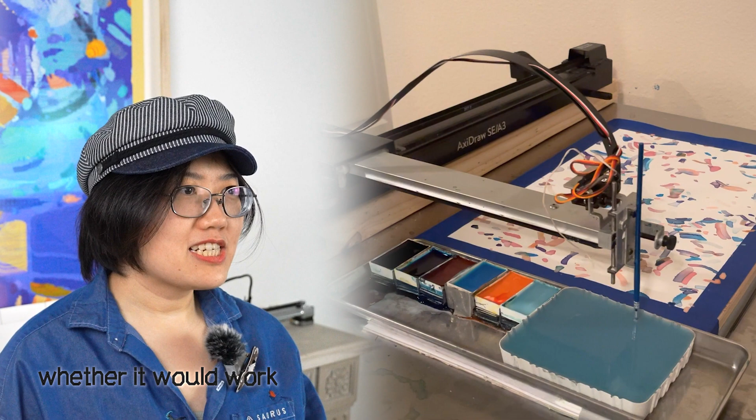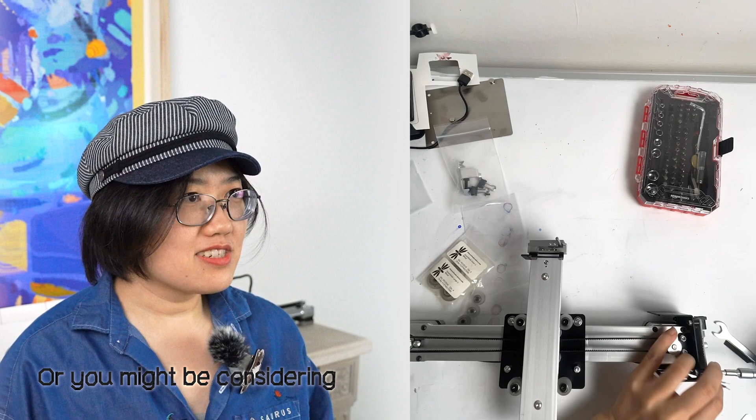Okay, let's get started. To make a plotter painting, you would need a plotter. Some of you might already have one and you're trying to decide whether it would work for the painting process or not. Or you might be looking at the available models and trying to decide which one to buy. Or you might be considering building your own plotter and trying to figure out what kind of design you would need so that it could make paintings. So let's talk about several things I think you should consider when deciding whether a plotter would work for painting or not.

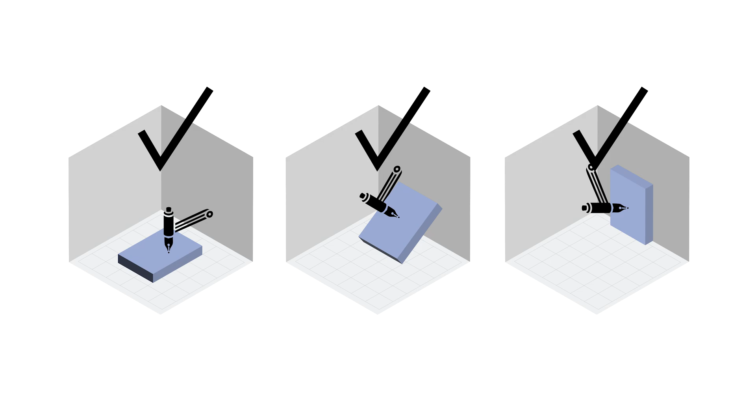First, consider the plotting angle of your plotter and think about how that would impact your paint. There are so many types of plotters. Some are designed to plot on a horizontal surface, some are designed to plot on vertical surfaces, and there are also plotters designed to plot on a slanted surface. If you're plotting with a pen or a marker, the plotting angle might not make a huge difference. However, if you're painting, this plotting angle is actually quite important.

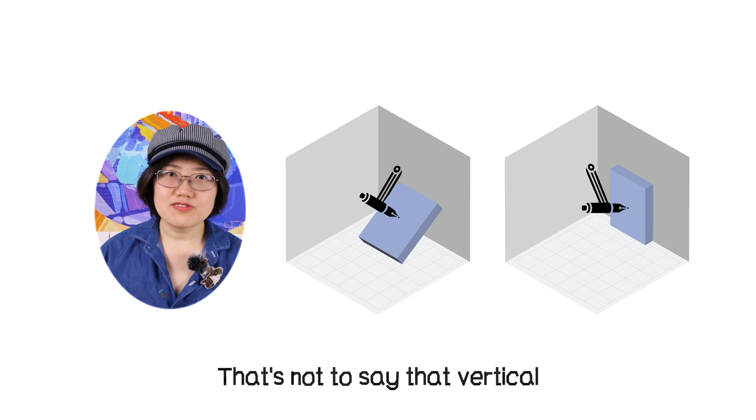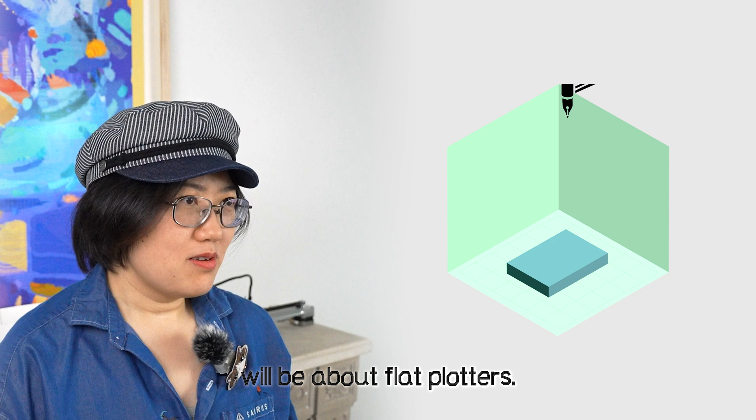If you're painting with materials that can flow, such as watercolor, ink, or acrylic, plotting at an angle means that your paint will flow down. That's not to say that a vertical or slanted plotter wouldn't be able to paint. You can definitely make paintings with vertical plotters if you're using thicker materials, for instance oil paint or thick acrylic. Because I only use flat plotters, everything I show in this course will be about flat plotters, but many of the techniques I discuss could also be applicable to vertical and slanted plotters.

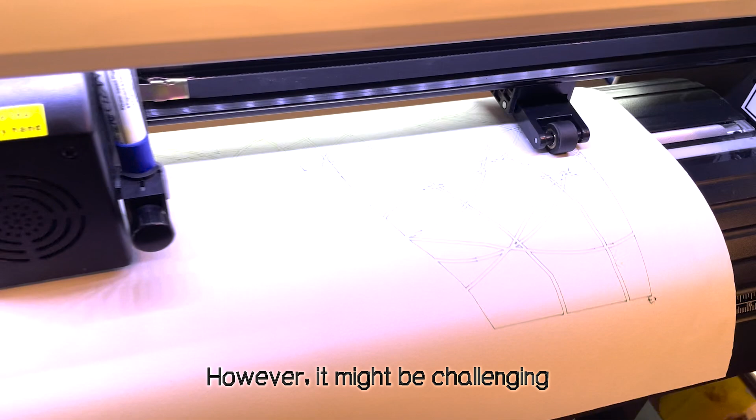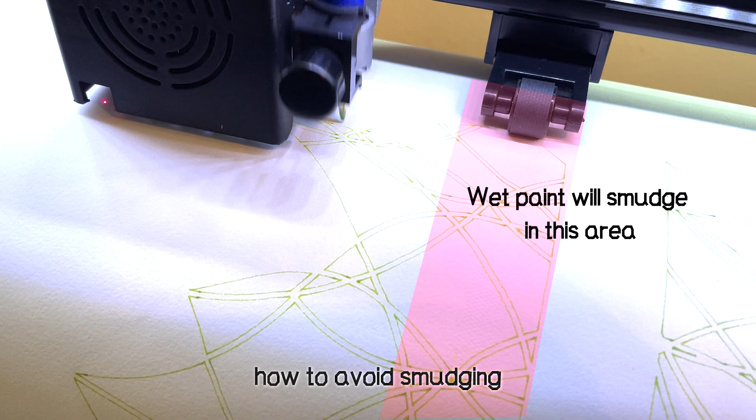Second, check if your plotter has a paper feeding mechanism. Some plotters might have one - for instance, a roller so that you can save a lot of space and plot really long images without a huge footprint. However, it might be challenging to paint with this type of plotter. These machines typically move the paper with some kind of tire, and those tires are in constant contact with the paper, so you need to figure out how to avoid smudging your paintings during the process.

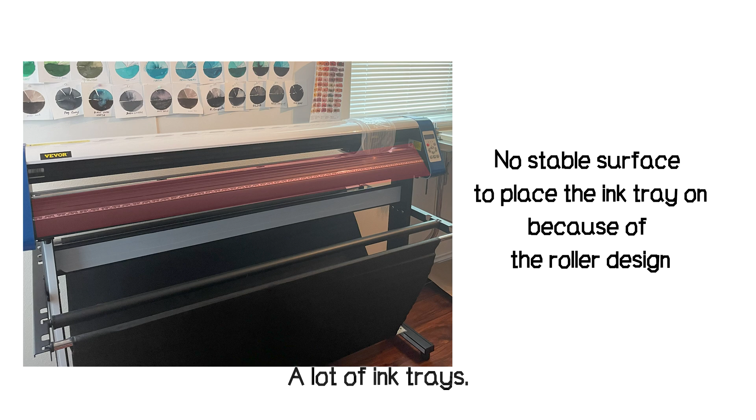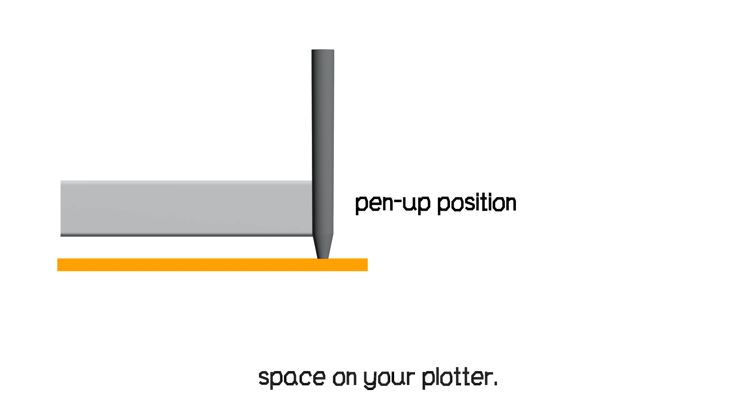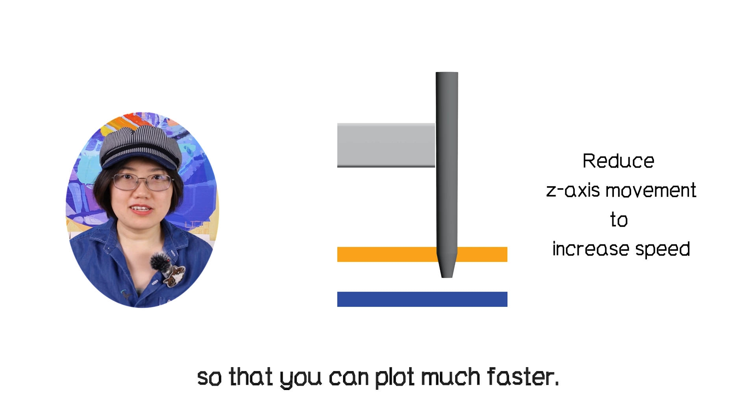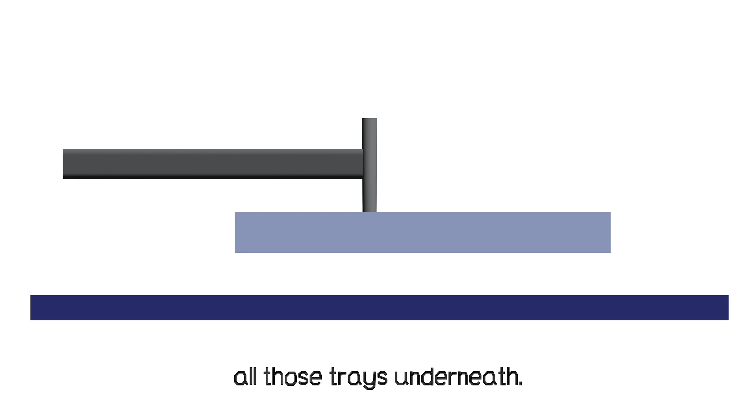And also, it might be a challenge to figure out where to put all of those little ink trays. Third, consider whether there's enough space in the Z direction. If you're plotting with a pen or a marker, it's likely that you don't need a huge Z-axis space on your plotter. If you just lift your pen slightly off the page, you would not leave a mark, and many plotters might actually optimize this so you can plot much faster. However, for plotting with paint, you need a much larger Z-axis space so that you can fit all those trays underneath. So if your plotter has extremely limited Z-axis height, that might be a problem.

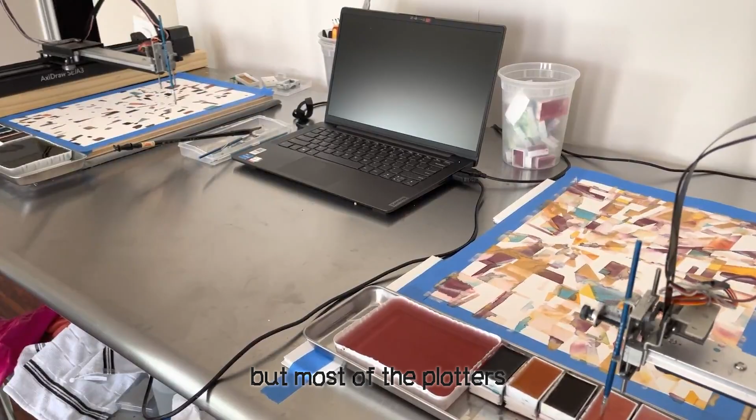So that's all the criteria I'd start with if you're making a selection. Now let's talk about the plotter that I'll be using in this course. I have many plotters, but most of the plotters that I own are AxiDraws. This is a high-precision plotter that checks all of my boxes.

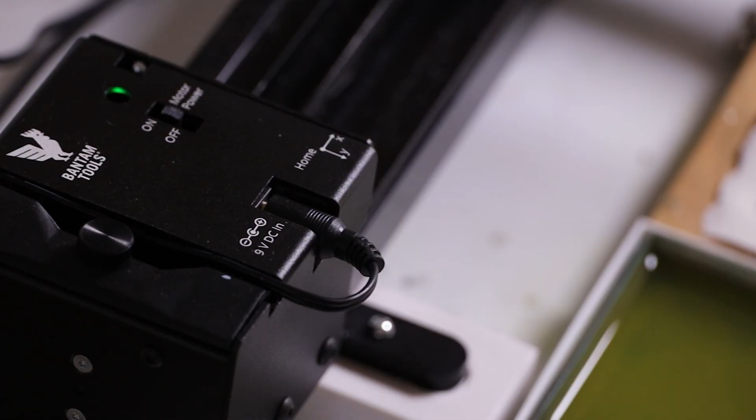It is made by Evil Mad Scientist Laboratories, which recently joined forces with Bantam Tools. They have been releasing some new models recently, including this model called NextDraw. I have so many good things to say about AxiDraw - they are reliable, they are really easy to use, and they come with amazing customer support. I just love this machine, so I keep buying more of it.

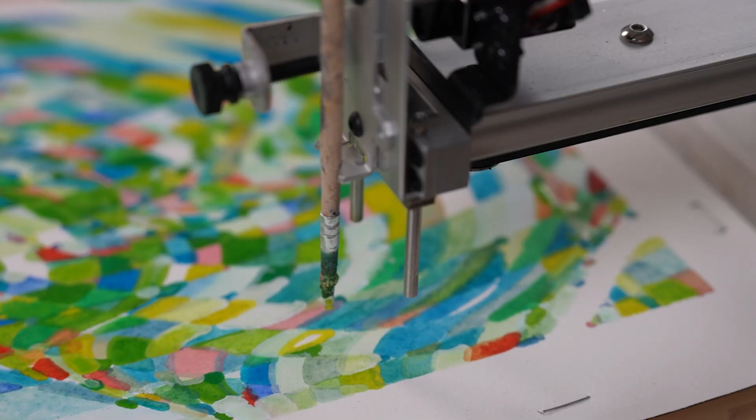In my 5 years of plotting so far, I only had one serious issue with AxiDraw, which I'm really happy to say has been fixed by a recent hardware upgrade. My issue with the original AxiDraw is with its servo motor.

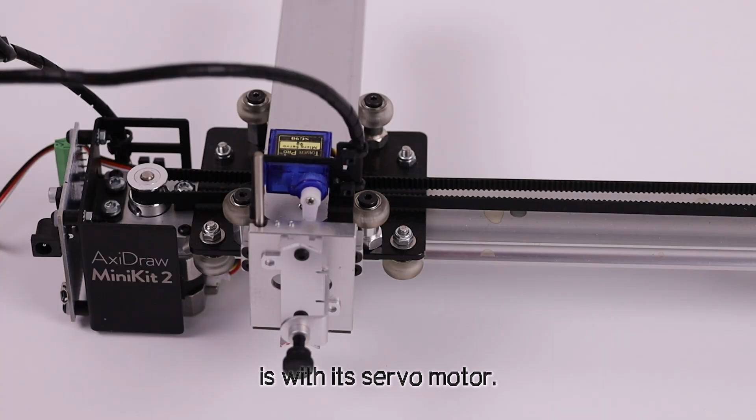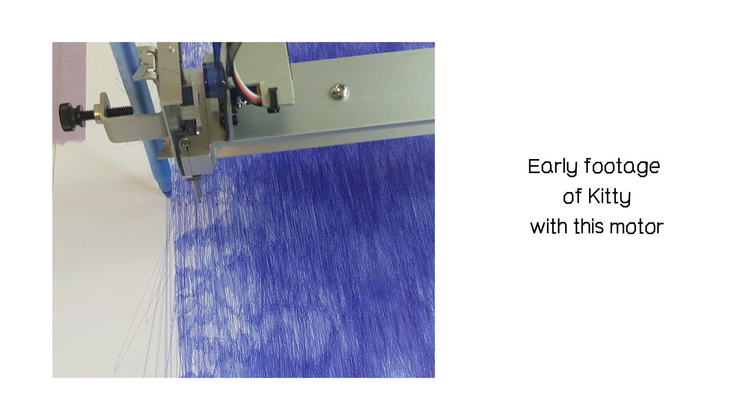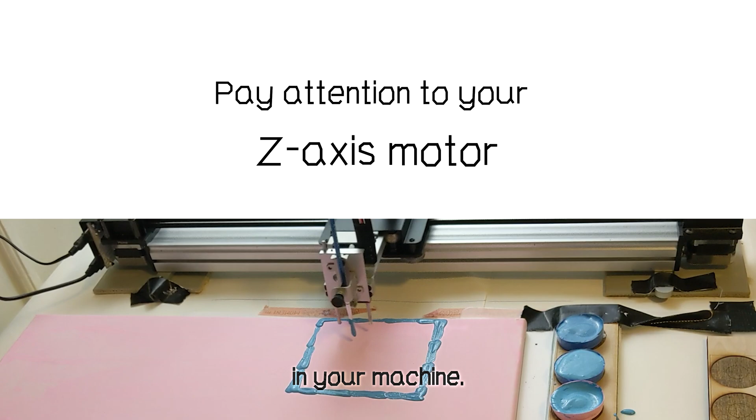AxiDraw came with the servo motor called SG90. It is a mini servo motor that is affordable, lightweight, and used in many robotics and DIY projects. If you're using a plotter that is not an AxiDraw, there's still a good chance that you have this motor in your machine.

This mini servo motor is not the most durable and long-lasting servo motor ever. After a certain number of ups and downs, it will eventually stop working. But because this motor is relatively cheap and easy to swap out, it's normally not a huge issue. I have met several artists who have been using their original servo motor with the AxiDraw for several years without having any issues.

However, painting with plotters using my method seems to damage those motors at a crazy speed. I had to replace my motor so many times. I think there are a combination of factors that caused this.

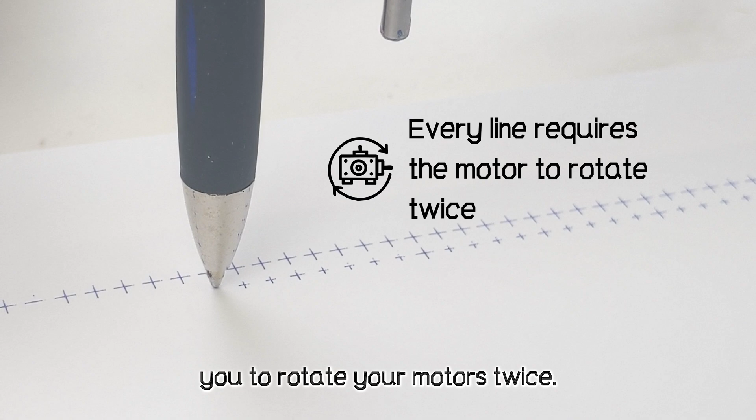To start, painting with plotters means that you are adding a lot more work for your plotters. If you're just drawing a line with your pen or a marker, you would do pen down, draw the line, and then pen up. So it requires you to rotate your motors twice. If you're painting, it means you are adding a lot more steps into the sequence.

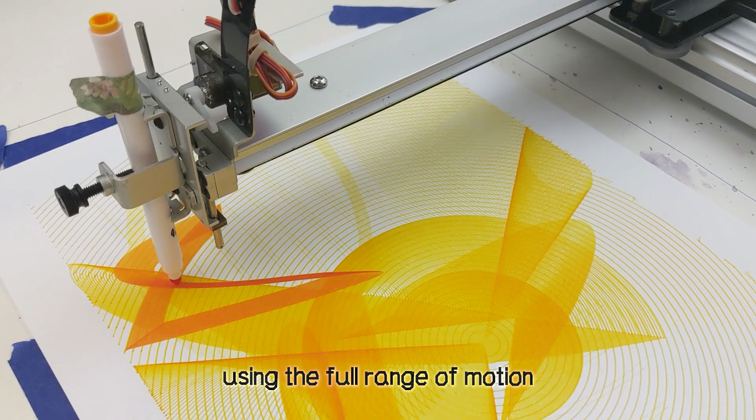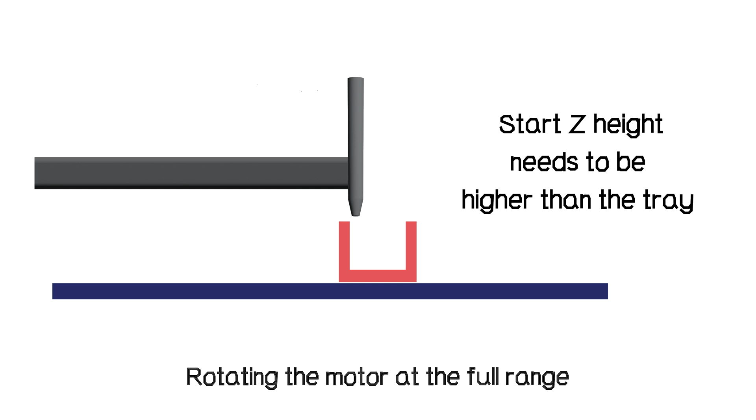The second potential cause might be associated with the range of motion required for painting. If you just draw with a pen, you only need to lift the pen slightly off the paper, so it is likely that you're not using the full range of motion provided by your motor. However, my painting method often requires the full Z-axis motion so that I can reach the bottom of the ink tray. Rotating the motor at the full range every time might also wear out the motor faster.

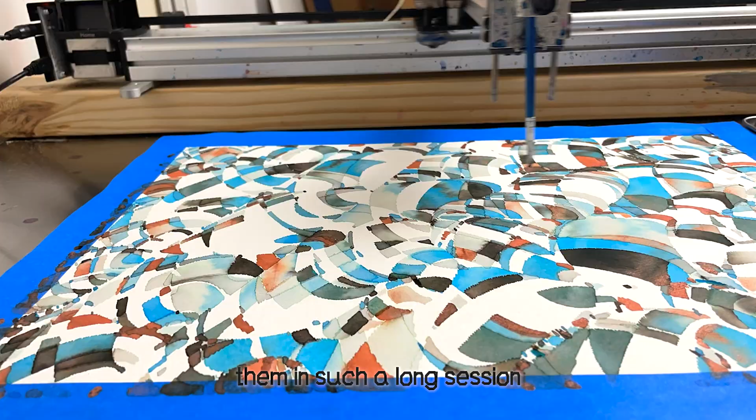Another potential cause I suspect is how long I actually run my plotters continuously. A typical A3 painting of mine would take any time between 12 hours to 24 hours. The motors are constantly running, and running them in such a long session seems to destroy them quickly.

So those potential causes are my best guesses, but because I am not an expert in motor design, I cannot confirm whether those are the actual causes. And even if I confirm that those are the actual causes, I don't know what I can do about them. I don't know how to magically reduce my plotter time from 12 hours to, let's say, 30 minutes so that I can save the life of my motor.

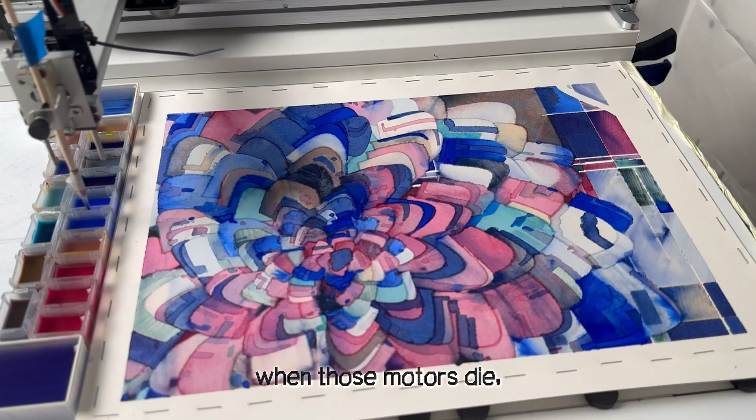So I just decided to suffer the consequences of those motor failures. When those motors die, it will typically make a scene. Your pen or brush will drag along your painting surface, kind of destroy your painting, leave unwanted marks, rip your paper.

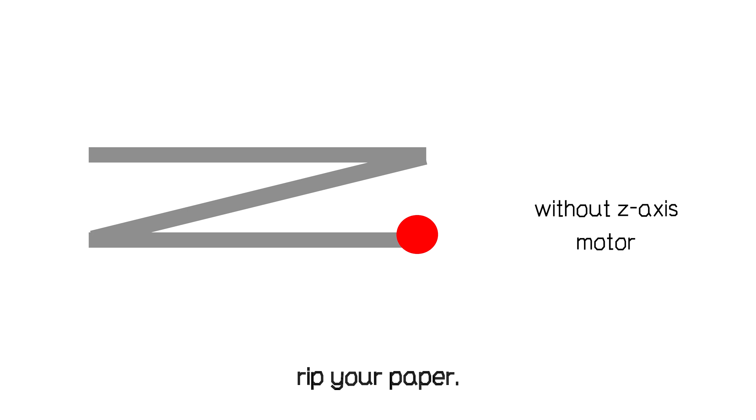Because you're painting, you have all those ink trays on your surface. You are likely to knock into some of the trays, have a water spill, have paint splashing everywhere. It's like a crime scene.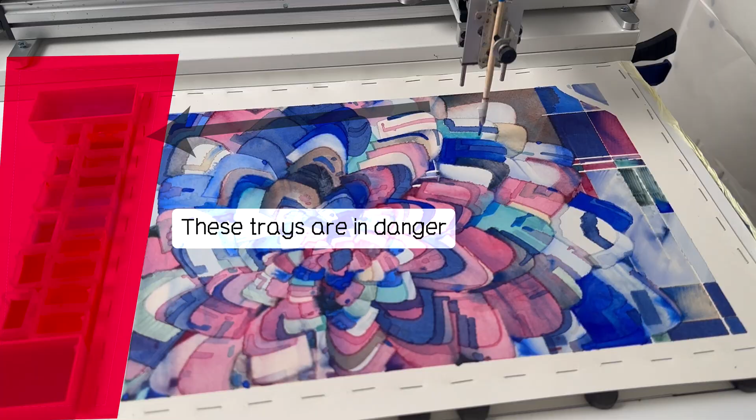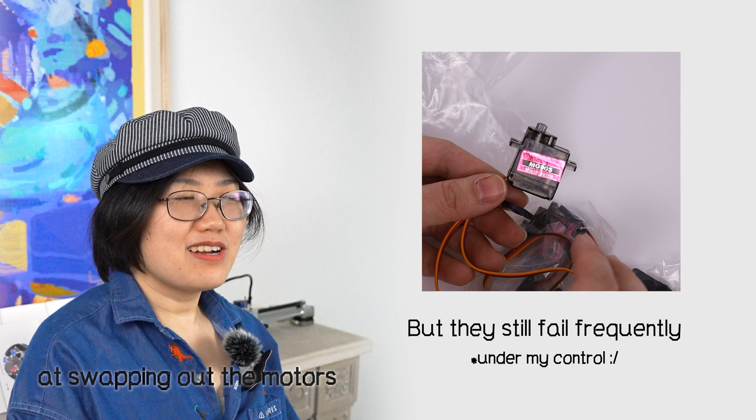Because I had broken so many motors and cleaned up so many times, now I am really efficient at swapping out the motors and then protecting everything around the plotter. And you can imagine how happy I was when Evil Mad Scientist Lab came up with a better solution.

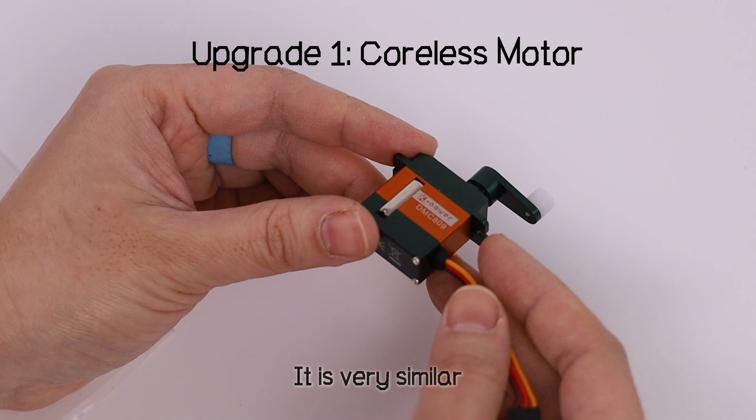They released 2 upgrades. The first one is a coreless servo motor. It is very similar to the original version, but much more sturdy, and replacing this motor is quite easy.

The second upgrade is the brushless motor. It is more expensive and requires slightly more setup because the motor needs a different voltage, but this is definitely something you can do in under an hour.

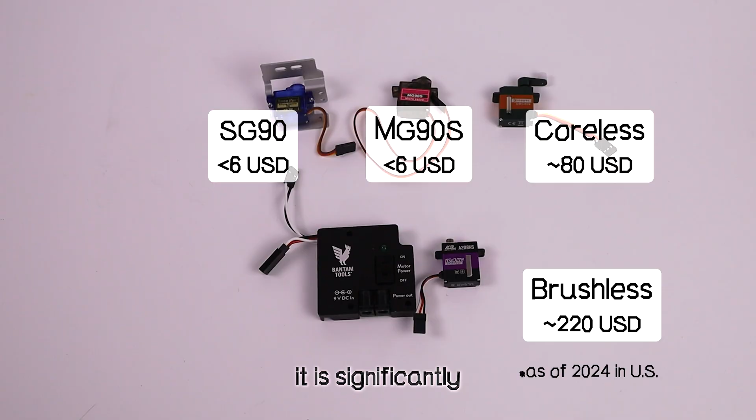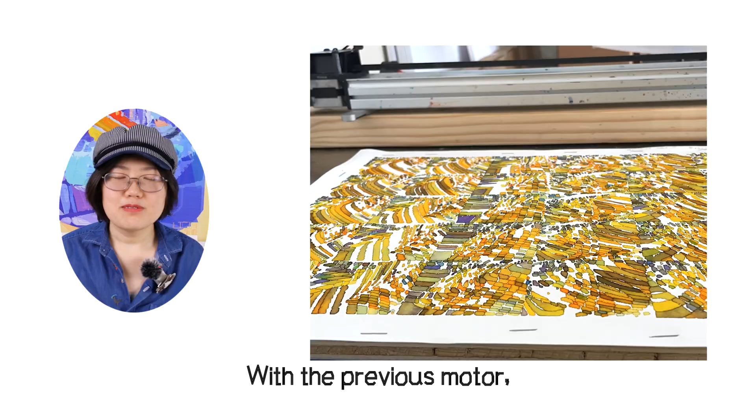It is significantly more expensive than the $6 MG90S motor, but in my opinion, it is worth every penny. It is much stronger and much more durable than the original version. With the previous motor, I'd say the longest usage time was probably around 200, definitely under 300 hours. But with the new one, I have been using it for thousands of hours and it hasn't shown any issues so far.

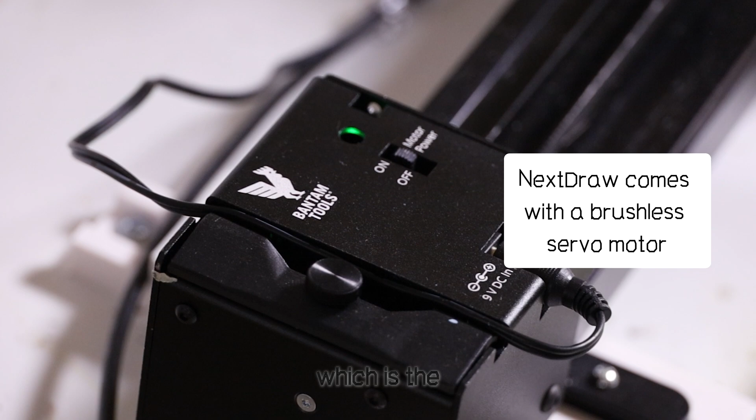So my conclusion is, I'd highly recommend that you get this upgrade if you're getting an AxiDraw. If you're getting NextDraw, which is the upgraded version of AxiDraw, you don't have to worry about this.

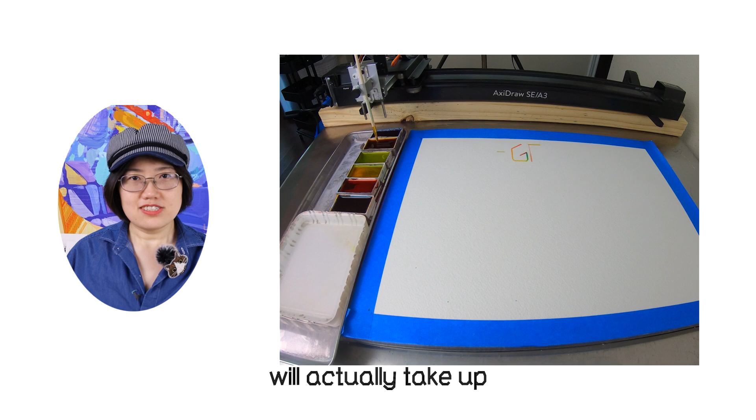Just one more thing before we move on to the next part. If you're considering buying a plotter, I'd recommend getting a big one. You see, the painting trays will actually take up a significant space.

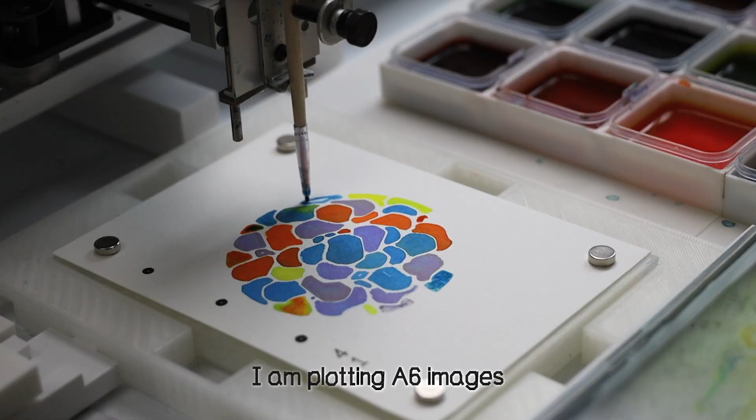So if you have an A3 plotter, you can never paint an A3 image. It will be a little smaller. You can always plot smaller images with bigger machines. For instance, like what I'm doing here, I am plotting A6 images with an A3 plotter.

So if your space and budget allow, I'd recommend getting a bigger plotter so that you have more area to work with.

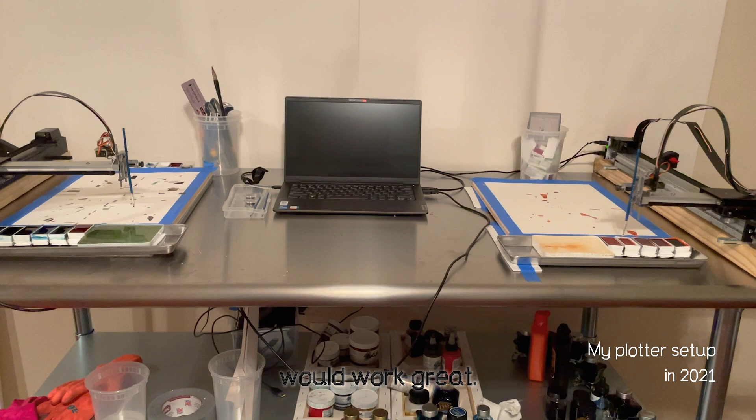Now you have a plotter, it's likely that you also need a computer to control it. Some plotters come with a built-in computer you can directly input data into and plot. But AxiDraw doesn't, so you'd need a laptop or desktop. Your laptop would work great, but if you have really long plotting sessions like I do with my paintings, your computer would have to stay on the entire time.

Therefore, I use Raspberry Pis to control my plotters. They are powerful enough to operate the plotter, significantly cheaper than laptops, and they won't consume as much energy as a typical laptop.

Previously, I connected a portable monitor to the Raspberry Pi and used a USB stick to transfer my design.

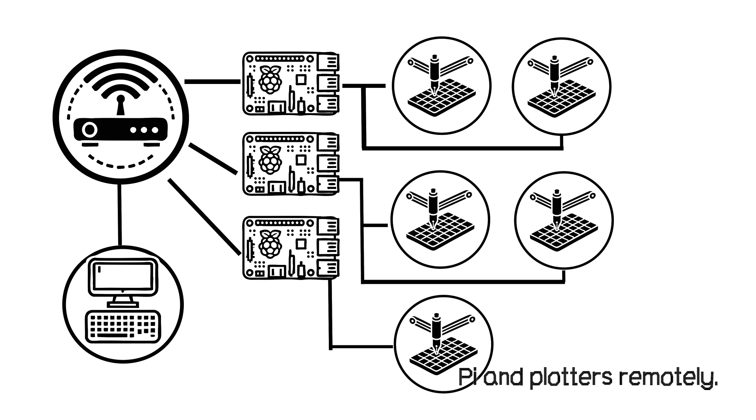But I have recently switched to a much cleaner way of operating those plotters by setting up a network and controlling all of the Raspberry Pis and plotters remotely. This might be overkill if you're only operating one machine, but if this is something you'd like to learn more about, please let me know. I might make a video about this in the future.

Now you have a plotter and a computer to control it. Let's look at how to prepare your machine and your painting environment. I'll share four principles that I use in my studio to keep everything safe and working properly.

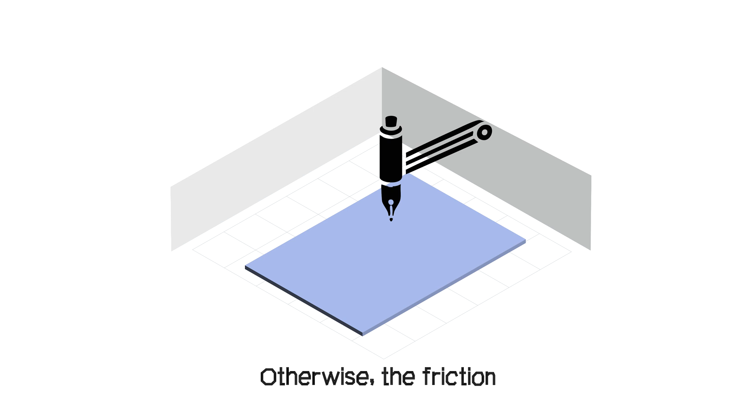First, nothing can move except for the plotter arm. When you operate the plotter, the first thing you'll notice is that you need to fix the paper in place. Otherwise, the friction between the pen and the paper will move the paper. This is true for the ink trays too, so you'll need a mechanism to keep the paper and ink trays in place.

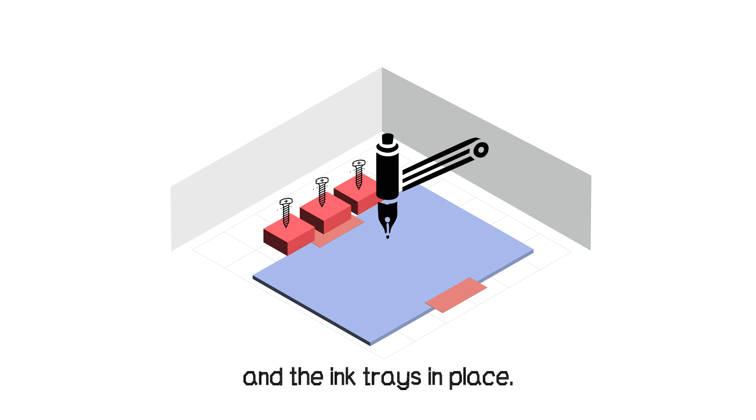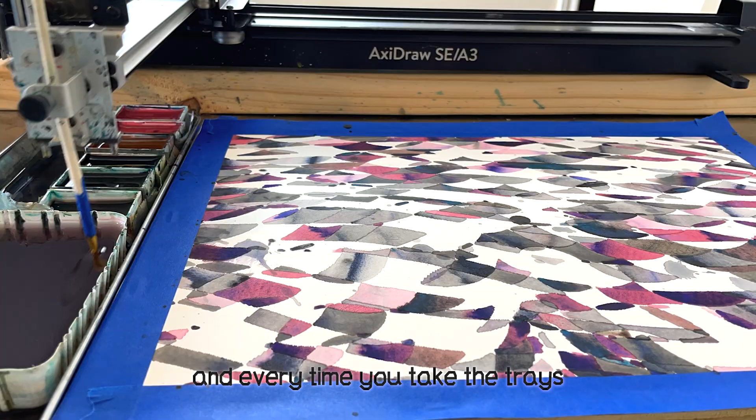I have tried many ways to fix my paper and ink trays, starting with tape, which is the most accessible and easy to use method. The issue is that they look a little too taped together, and every time you take the trays to wash, you have to make sure to tape everything back to the exact location. It gets tedious. Taping everything together is great when you're getting started and trying different setups—it's a quick way to get everything running.

However, once you figure out your ideal setup, I'd recommend moving away from tape to something more stable and permanent. Since last year, all of my plotters have switched to a magnetic-based plotting environment. The idea is simple: I have a magnetic board under the plotter, and I add magnets to whatever I need to fix.

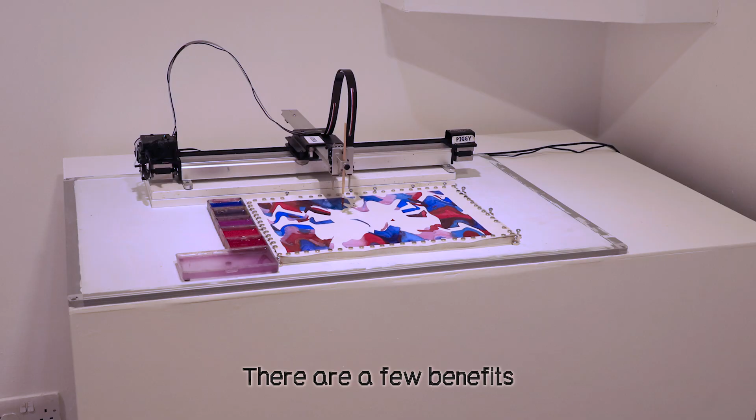If you have a metal tabletop, that's great, you're ready to go. But if you don't, you can also use a magnetic whiteboard. There are a few benefits besides being able to stick magnets on them—they're relatively economical, available in various sizes, and very easy to clean. If they get too dirty, you can paint over them, sand them, do whatever you want, and they're still functional.

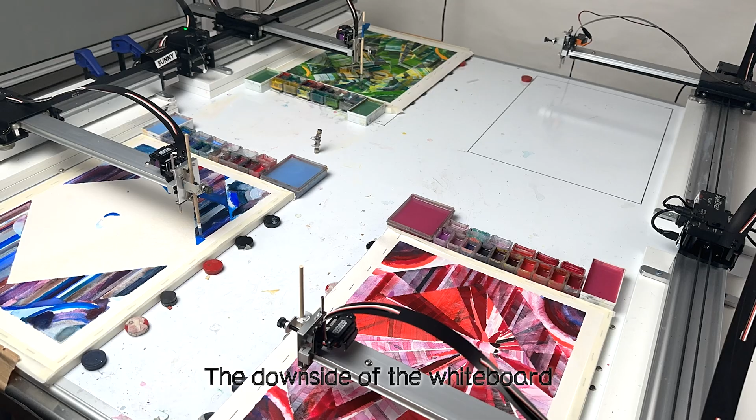The downside of the whiteboard is that they're not always flat, especially the large ones. My board is 1.2 meters and it's slightly warped. This warping doesn't matter much to me, but keep in mind it might bring some distortion to your image. Besides having a system to fix your paper and ink trays, it's also very important to fix your plotter in place.

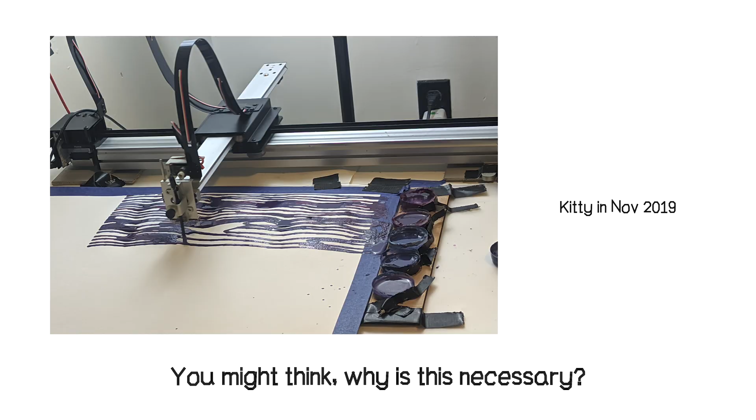You might think, why is this necessary? Your plotter is heavy enough, it doesn't move easily, so why do you still have to fix it in place? Well, that's what I thought initially. I didn't fix my plotter, it just sat on my table while doing the paintings.

It worked fine until one day I heard a super loud noise, and guess what—my plotter was on the floor, it just fell off. Turns out the motor had failed, and when it failed, the brush was at a low position, so it knocked into one of the paint trays. And because there was nothing holding the plotter, this force eventually pushed the plotter off the table.

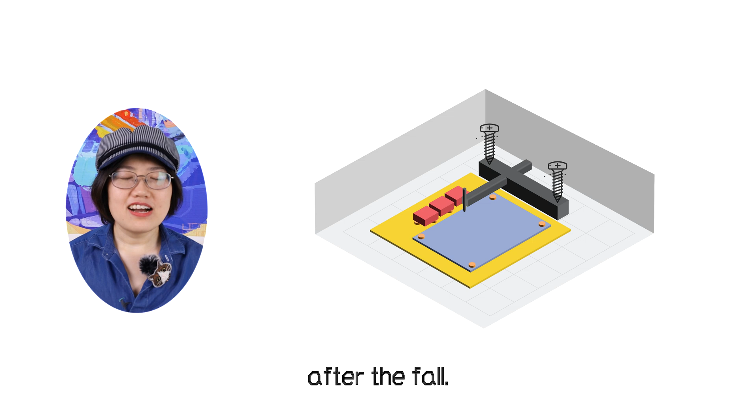Luckily, nothing serious happened. My plotter, Kitty, was still functioning after the fall, but afterwards I always fix my plotter onto the surface so it would never fall off again.

How I fix my plotter onto the table also has some connections to the second point that I'm going to make. So let's jump to the second point so that I can show you why I do it this way.

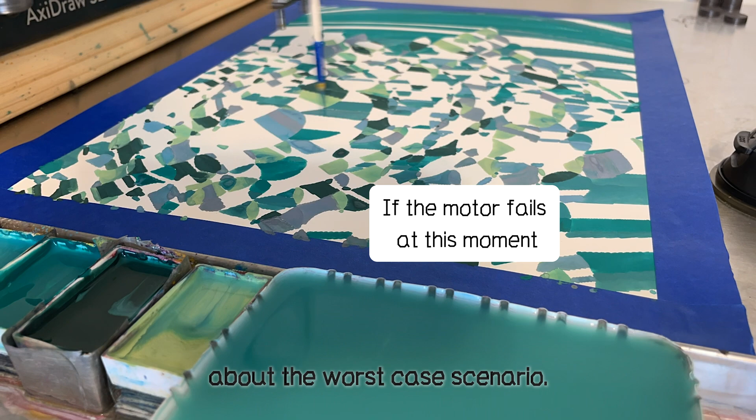Second point: water shouldn't reach electronics. When working with paint and water, it is important to think about the worst case scenario. If all of this water and paint are knocked over and started flowing without any control, where would they go? My top priority is that they should not go into any electronics.

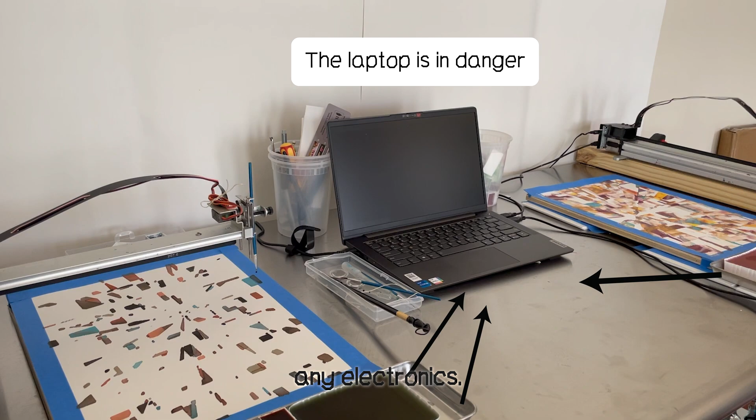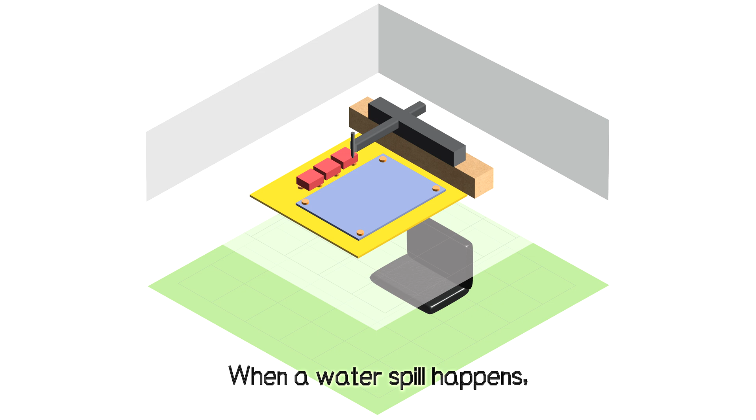To do that, I have a multi-level setup. I raise the plotter up and move the computers and power sources down. When a water spill happens, it will flow across the table, but it will not be able to reach my plotter and computer easily. My table comes with a second level, so moving all of this computer downstairs is easy.

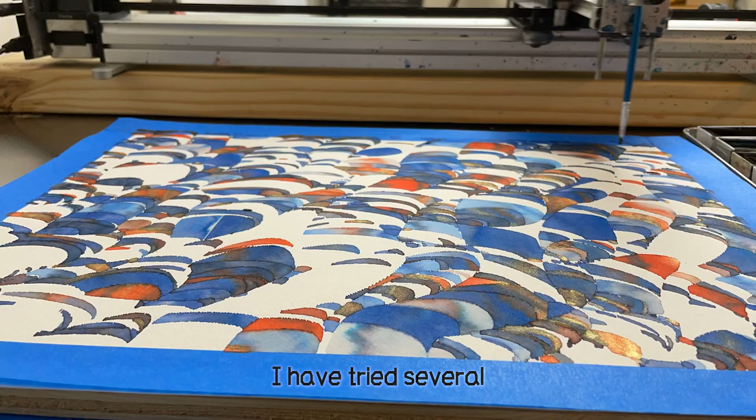I have tried several things to raise the plotter. You can use clamps to fix them in place.

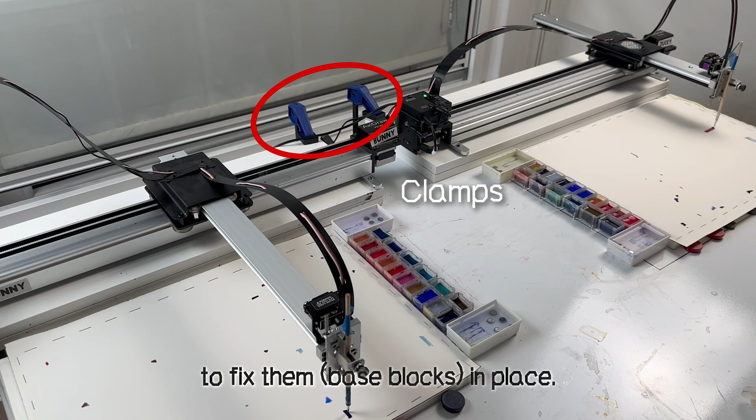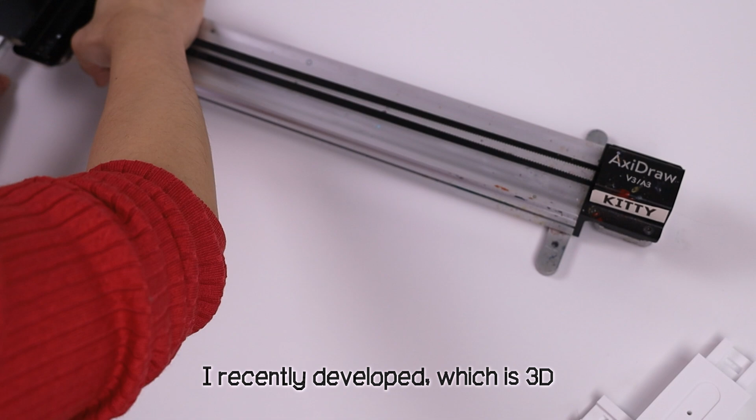Besides this method, I also want to show you a new method I recently developed, which is 3D printing your own base block. Those are my 3D printed base blocks that fit perfectly to the leg of the AxiDraw.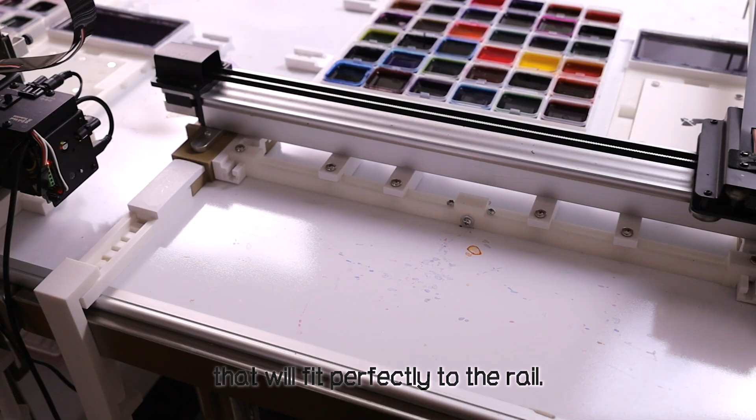Those additional rails serve three different purposes. First, I can 3D print my own clamps that will fit perfectly to the rail. Second, these rails can be drilled through easily. Third, I developed a rail extension system so that whatever table situation I have, I can reach to the edge of the table.

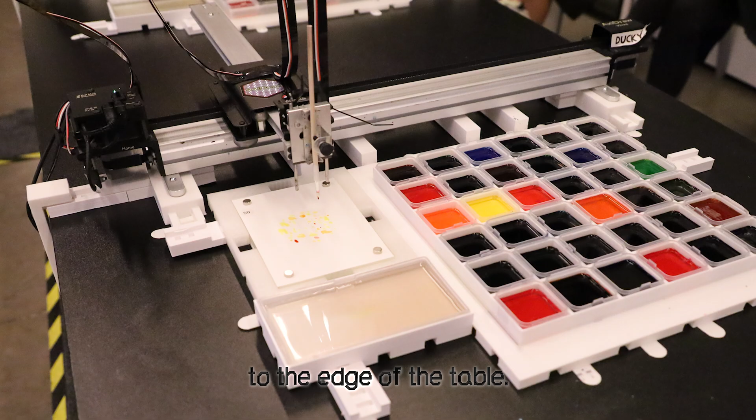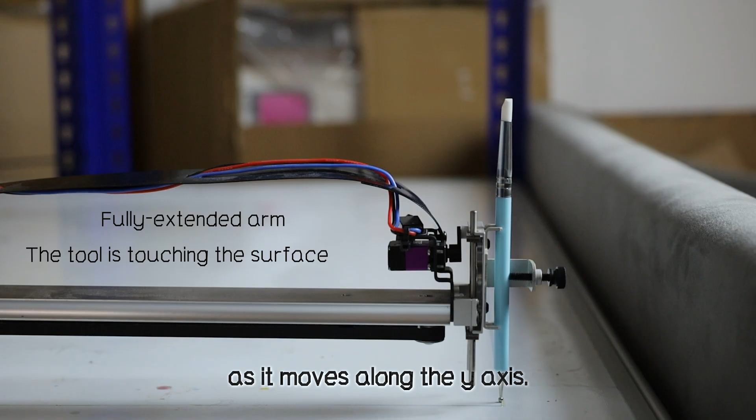Another issue that this 3D printed base solves is the Z-axis dropping issue. If you have a bigger one, such as the A1 AxiDraw, you will notice that the Z-axis will drop quite a bit as it moves along the Y-axis. This is basically gravity doing its job. It is a really long and heavy arm, so it drops down as it extends.

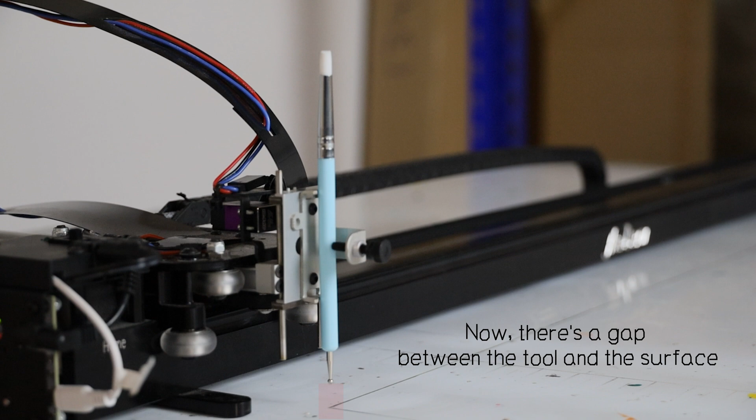When I 3D print my plotter base blocks, I can print them slanted so that it would offset the Z-axis dropping. We will talk about how to design those 3D models with Python in one of the future videos.

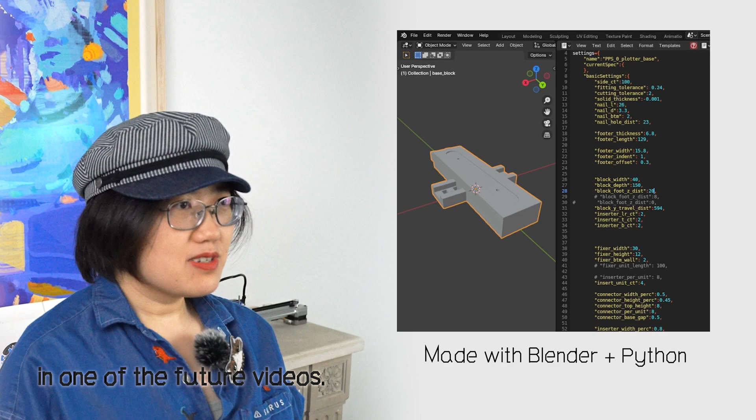But for now, if you just want to try and print your own plotter base, you can go directly to our GitHub repository and the files are there waiting for you.

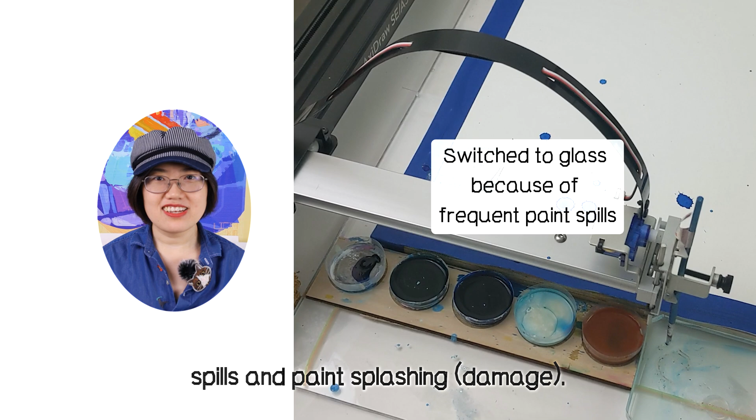Third principle: be prepared for paint splashing damage. The third principle also seems really obvious, but sometimes I still fail at this. So previously, I told you my story of experiencing many plotter failures which caused lots of water spills and paint splashing. I also want to tell you how much damage they had done to everything around the plotter.

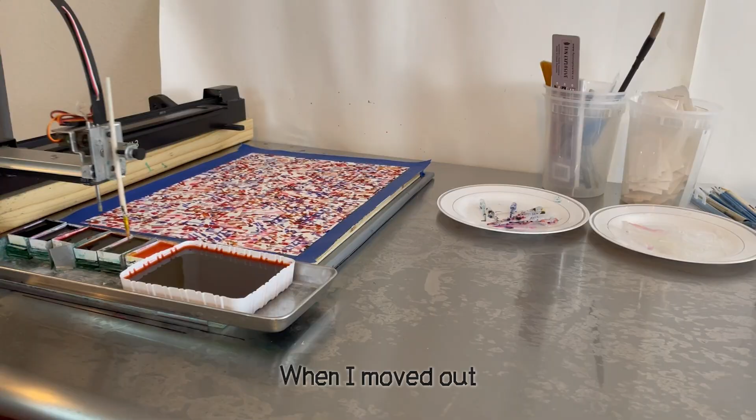The walls are especially difficult to clean. Some of the ink might actually dye the wall permanently. So this is absolutely true. When I moved out of my previous studio, I didn't get my deposit back. The rental company told me they had to paint the wall twice in order to cover all of the marks that my plotter left.

So let this be a warning. Be prepared for paint splashing damage and just cover your walls. Buy a really large roll of paper, tape it onto the wall, and then you're prepared.

The last principle I'd share is to always double check your machines before you hit running. Before every plotter run, I think it's a best practice to make sure your plotter is in the correct state. There are two specific things that I would look for. First is whether you have returned your AxiDraw, your plotter, to its original home location.

The second thing that I'm going to check for is whether I have set my brush at the correct Z-axis height.

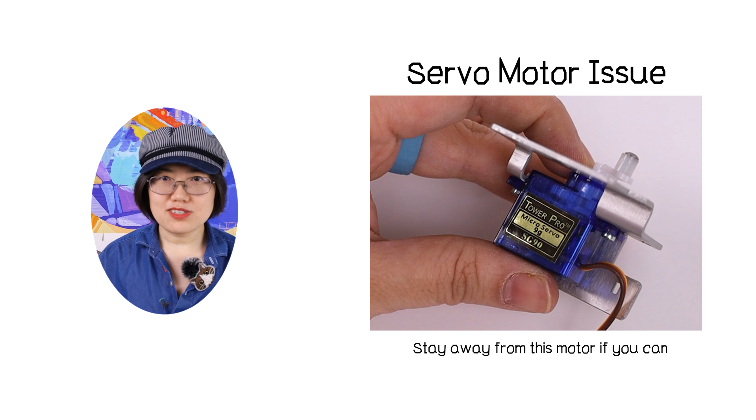Okay, so in today's video, I have discussed three criteria for picking a plotter for painting. We discussed a common issue with plotters, especially with the original AxiDraw servo motor. So make sure you check your motor and hope you have a really durable and sturdy motor to play with.

We also discussed the four principles that I use to prepare my machines and my painting environment to reduce the risk of water, paint, and electricity damage. I hope this information will be helpful to you when you are setting up your own plotter painting environment.